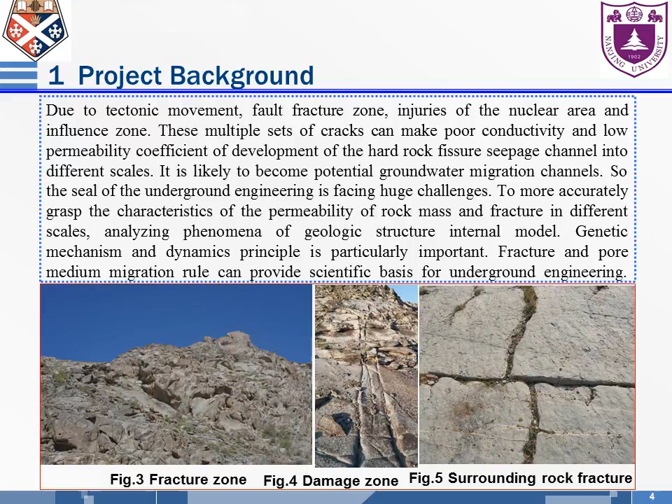Different scales of fracture have different meanings, and they are graded based on the scale of the structure surface, which is generally divided into five grades. The first and second grade fractures can be referred to as fault zones, with the main research on the controlling effect of regional structure. Fault length and width differences are the macroscopic dominant factors for water guidance.

Third, fourth, and fifth grade fractures can be collectively referred to as joint sets, relatively small in scale, with the main research on outcrop, rock face, and probing fissure joints. The extension length and opening degree of the joints are the main factors affecting the local stability and permeability of the rock mass.

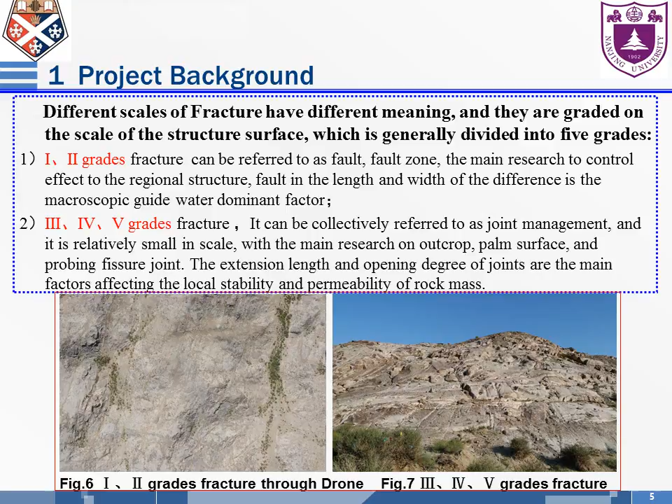Figures 6 and 7 show the first, second, third, fourth, and fifth grade fractures through drone and photographs.

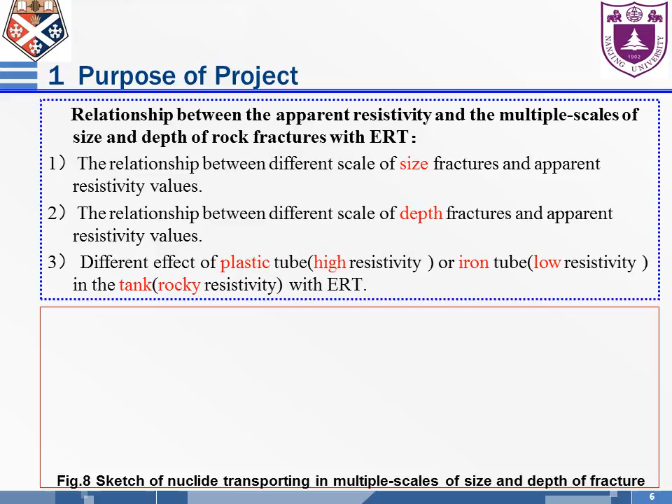The purpose of my project, as shown in Figure 8, is the sketch of nuclide transport in multiple scales of size and depth of fracture. I want to figure out the relationship between apparent resistivity and the multiple scales of size and depth of rock fracture with ERT. The first is the size, the second is the depth, and the third is how to reflect the effect of the plastic tube.

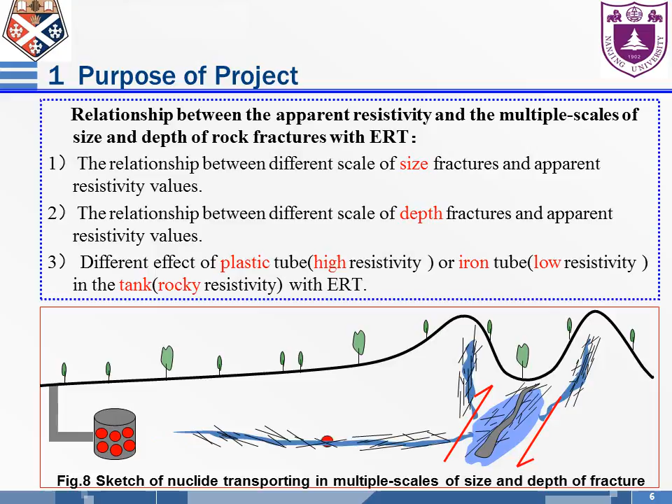It stands for higher resistivity for the iron tube, low resistivity, and in the tank the tank stands for the rock resistance measured with ERT. In Figure 8, you can see the nuclide transported over time in the...

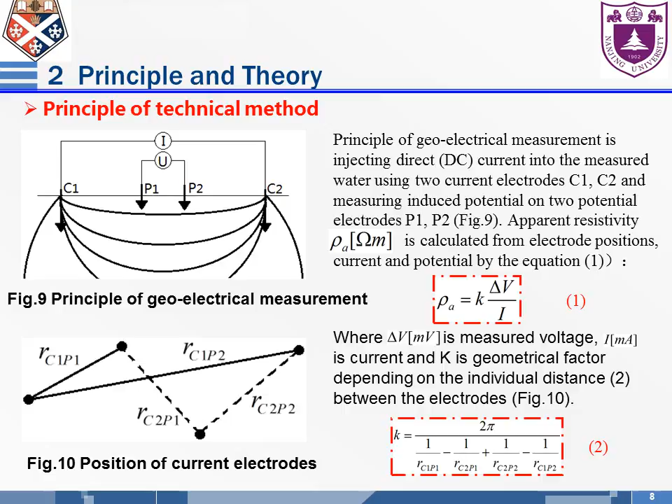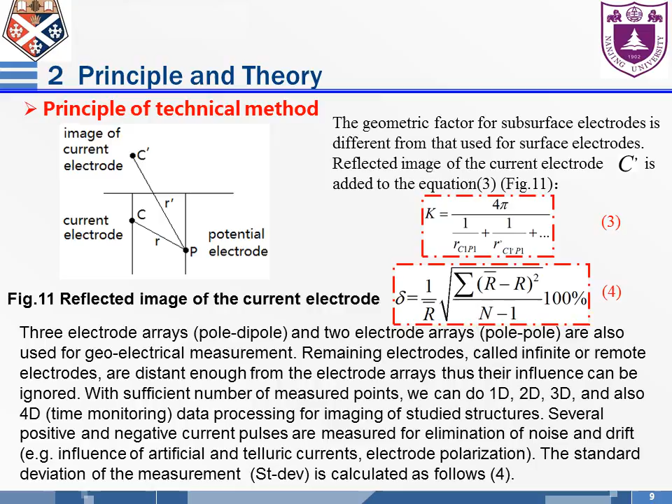From equation one, and since the positions of the current electrodes differ, you measure the difference k, calculated from equation two. Equation three is the reflected image of the current electrode. From this equation, you can calculate the principle of the technical method.

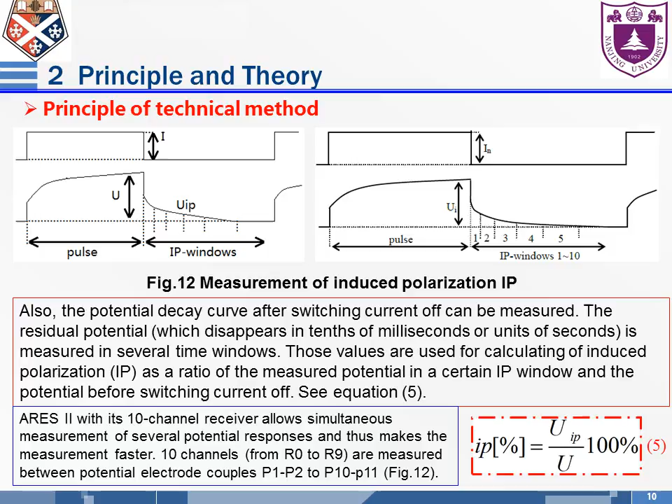The measurement of induced polarization (IP) is mainly done using the ARES II. The ARES II, with its 10-channel receiver, allows simultaneous measurement of several potential responses, making the measurement faster. This is the equipment we use; our third part covers methods, parameters, and equipment.

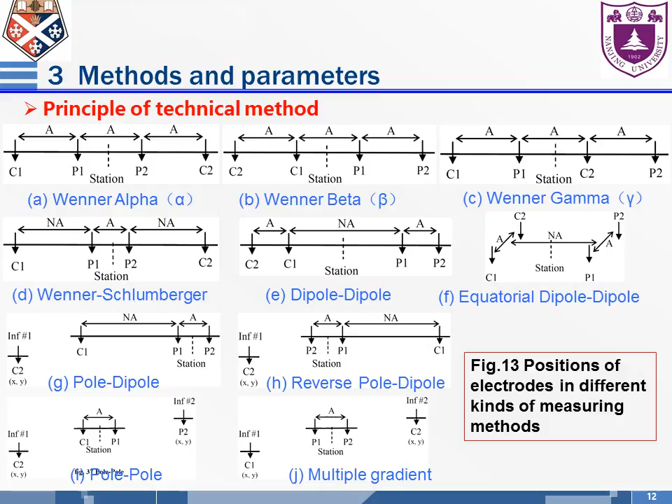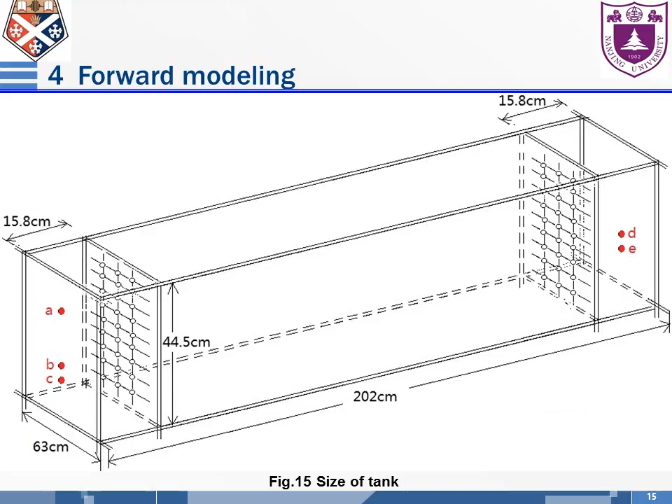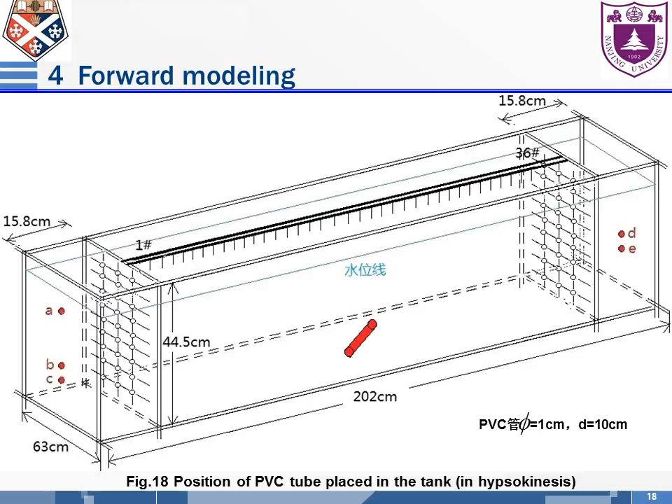The fourth part is the forward modeling and the experiment. I built it as an experimental test, like the tank, same size and same condition. This is the plastic PVC tube I placed into the tank in hypsokinesis. This is forward modeling.

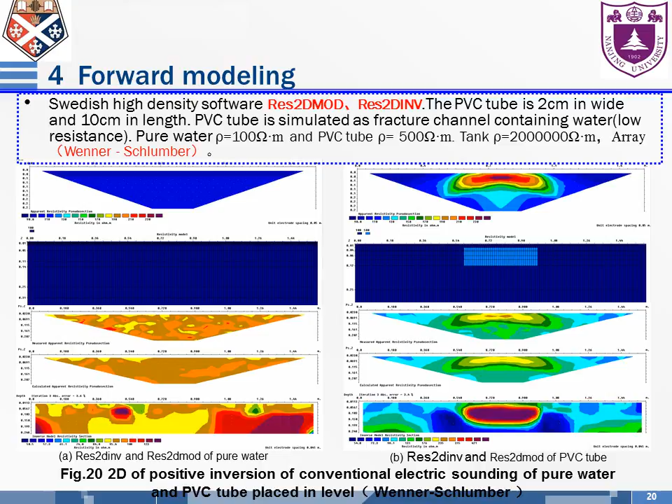I use the Swedish high density software, RES 2D for the modeling and inversion, to calculate the PVC tube. From the left is pure water, and the right side is a PVC tube, placed in level. You can see it has a good effect.

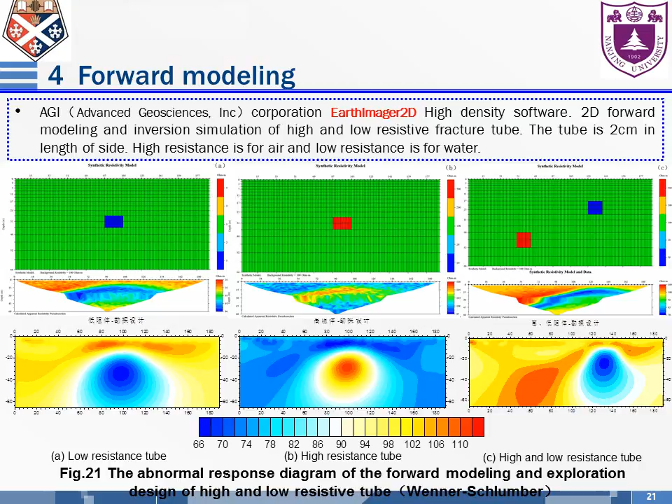This is using the Advanced Geosciences Corporation EarthImager 2D high density software. I calculated the high and low resistive fracture tube. The tube is 2 centimeters in length on the side. High resistance is for air, and low resistance is for water. You can see a good anomalous response of the forward model and exploration design of the higher and lower resistive tube.

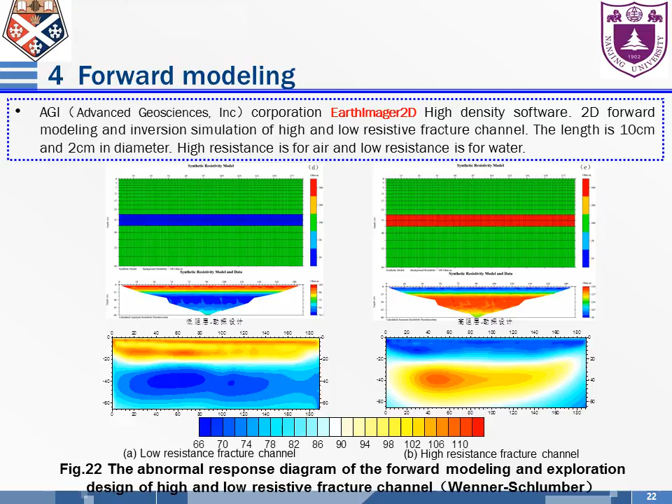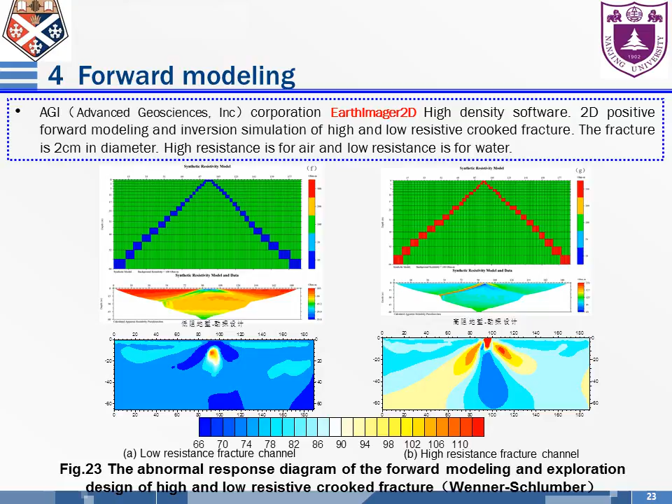The area I used when simulating - I simulated this as the fracture channel. The blue stands for the water channel, and the red stands for the air channel. You can see the abnormal response. This represents the crooked fracture. The blue is also the low resistive fracture channel, and the red stands for the higher resistive crooked fracture. That also has a good effect, but not very good.

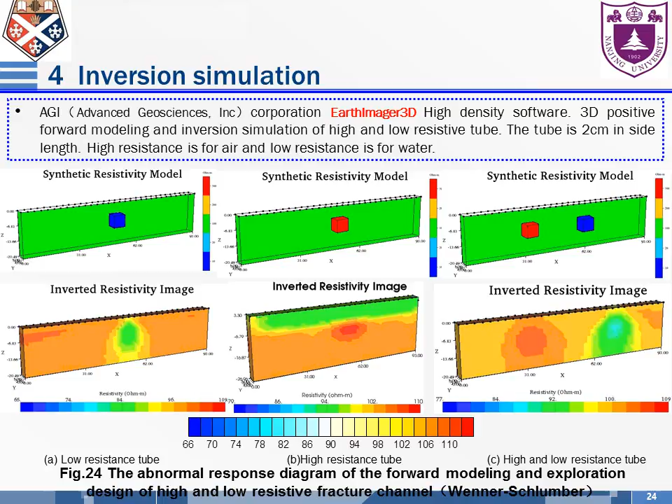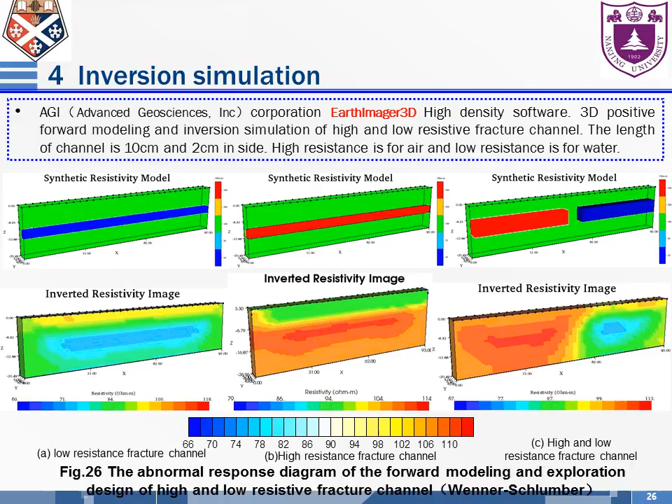This is an abnormal response slice map of the high and low resistive tube. This represents the fracture channel. You can also see a good effect and exploration design in figure 26. This is an abnormal response slice map of the high and low resistive fracture channel.

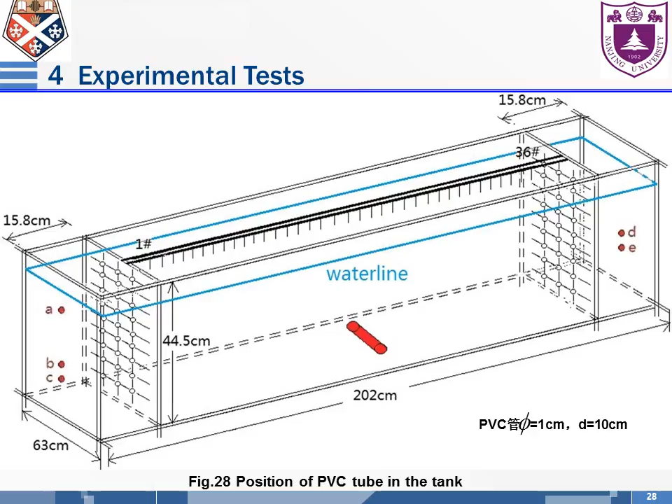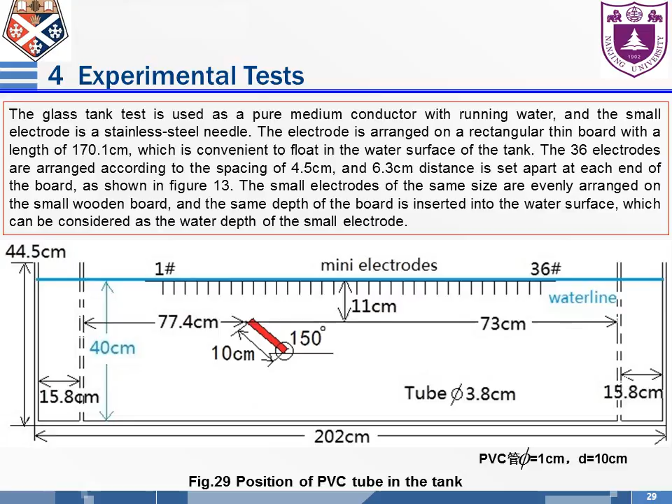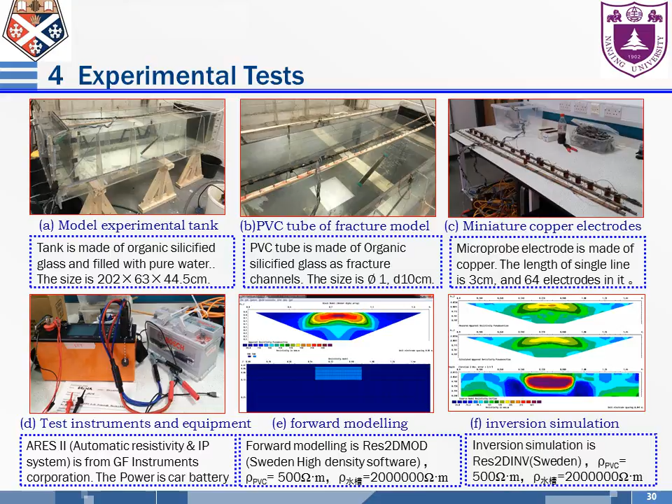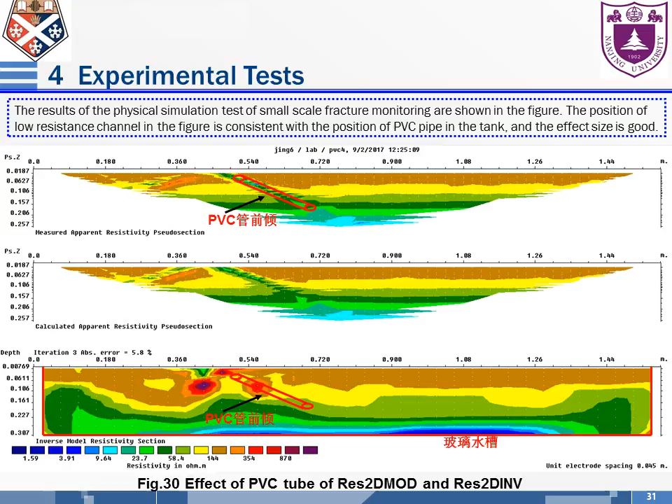Finally, I got some results of the physical simulation test of small scale fracture monitoring, as shown in the picture. I carried out a lot of tests, but this one is typical - it has exactly what I want. The position of the low resistance channel in the figure is consistent with the position of the PVC pipe in the tank, and the effect size is good. You can see from figure 13 and 30.

So let's move to the results. I come up with four conclusions. First, you can see the blue represents low resistivity and the red represents higher resistivity. There is an obvious low resistive channel in the middle of the tank. That's what we want. The second is that the position of the low impedance channel is consistent with the position of the PVC tube in the tank.

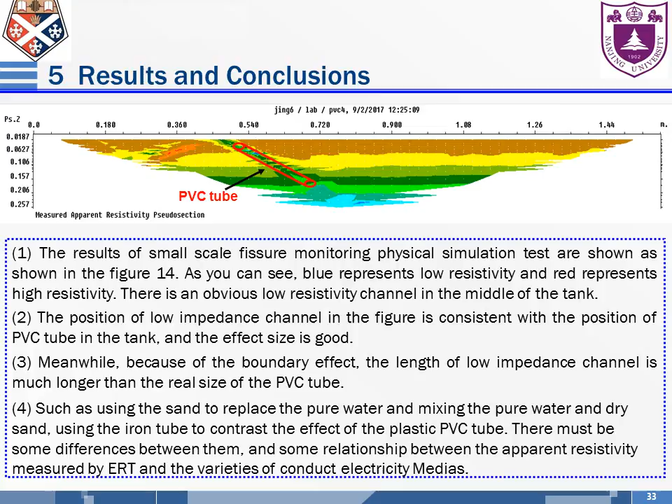The third, meanwhile, because of the boundary effect, the length of the low impedance channel is much longer than the real size of the PVC tube. So with such good ideas, I want to replace the pure water and mix it with dry sand. So I will do this in the future.

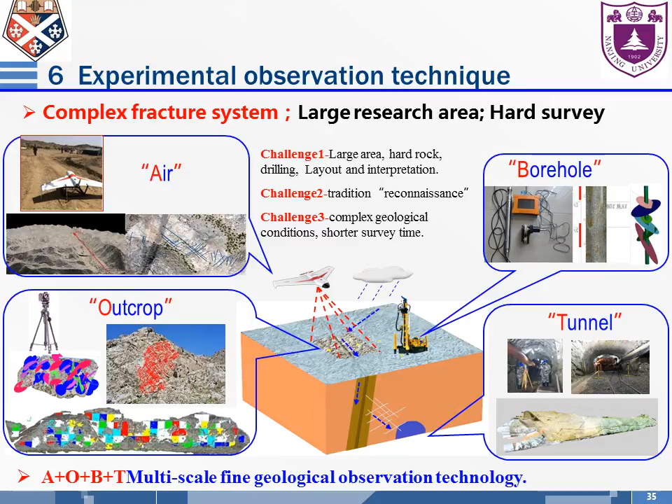I did some fieldwork in the Gansu province. I went through the air, outcrop, borehole and tunnel four steps. I came to geological observation technology to find out. We also did a lot of geological exploration and survey in Gansu province to find out which site is good to detect.

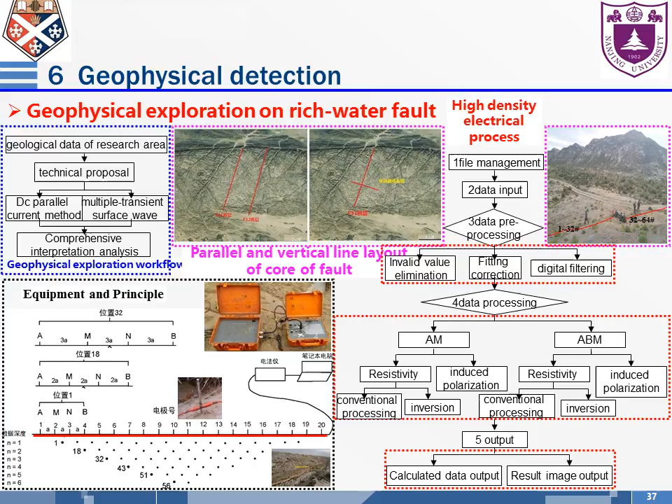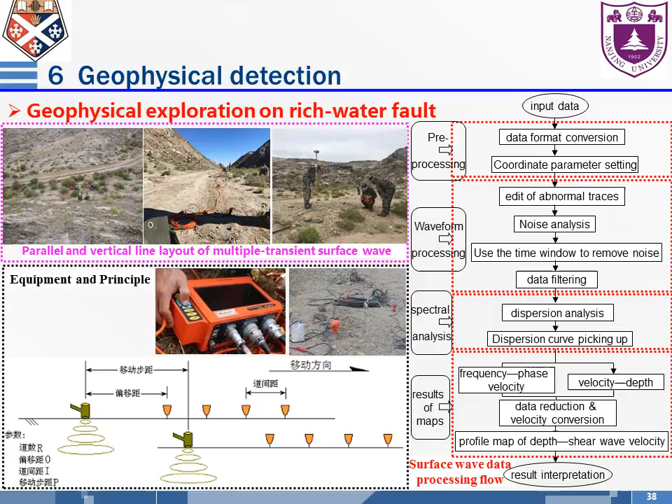So finally, we came up with geophysical detection. One is a high density electrical process, that's ERT, and we place two lines - parallel and vertical line layout - along with multi-channel transient surface wave, for the two effects of this: the fault core rock interface and the complete formation. The most complete rock interface is buried deep below the surface at 20 meters, and there are a lot of kinds of multiple cracks and fractures, shown in figure 31 and figure 32.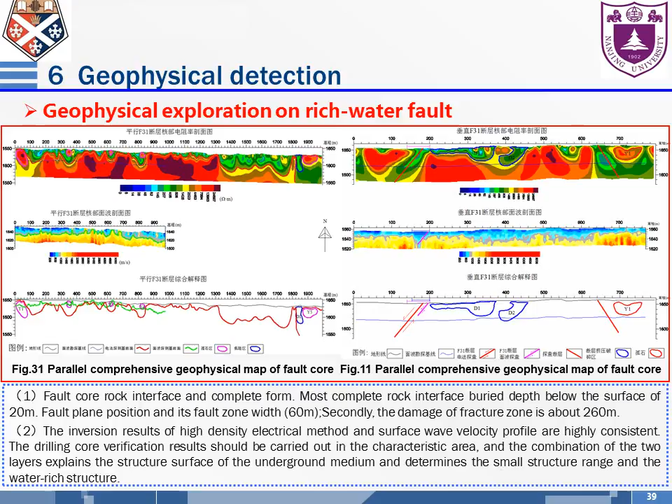I want to thank Professor Alessandro Tarantino again, and Bruna, who gave a lot of help to me when I was at the University of Strathclyde. Also, I want to thank Professor Li Xiaozhao and Professor Liu Lanbo, who gave me a lot of chances to explain what I wanted to do and my good ideas, and to publish on this special session.

So I will carry on my research deeper in the future, to contribute a lot to geophysical detection.